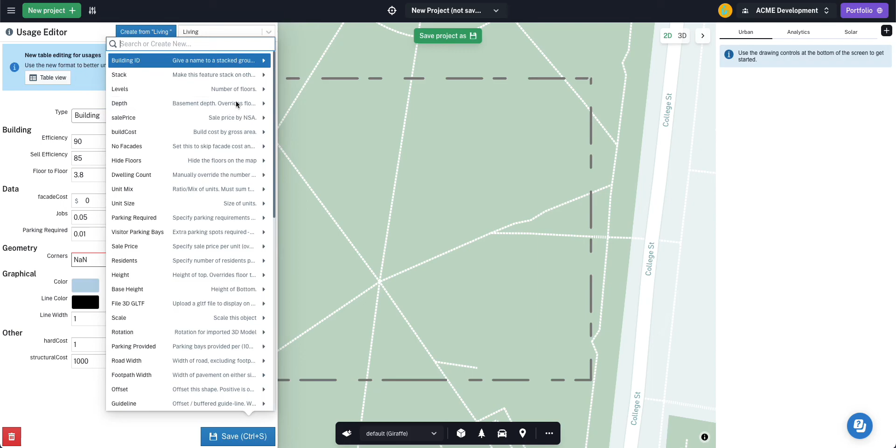Then I'm going to say the fit out cost. I'm going to say $1,000 for the living. Then I'm adding another property called the services cost, and that's going to allow for things like the electrician and all that sort of stuff.

And I'm imagining these as a per meter cost, so $1,000 per meter. I could think about this: how many joists do I need? What are their centers? What's the linear meter cost? Okay, good. Boom, boom, boom. It's $1,000. Multiply it out.

Save that. So these elemental costs can have sub elements, but for this approach I'm not going to do that. Now I'm just rolling them up to the right granularity.

So the structural cost for the bathroom is going to be the same. The fit out's going to be double, and the services is going to be much more. And the color's got to be slightly different.

Save, and then from bathroom I'm going to create kitchen and make that kitchen a warm, homely yellow. Oop, it's gone brown. Maybe that's about the same, maybe slightly lower. I'll just put some different numbers so we're looking at something different. The services cost is 900.

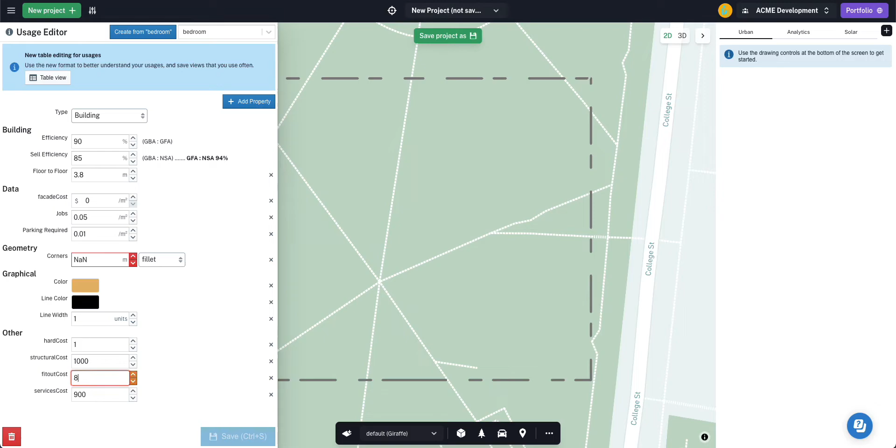Then the final thing I'm going to build is bedroom, the 4 main room types in a house, and that'll come down to 800 and 240. Save changes. Okay, and with that we can design the house.

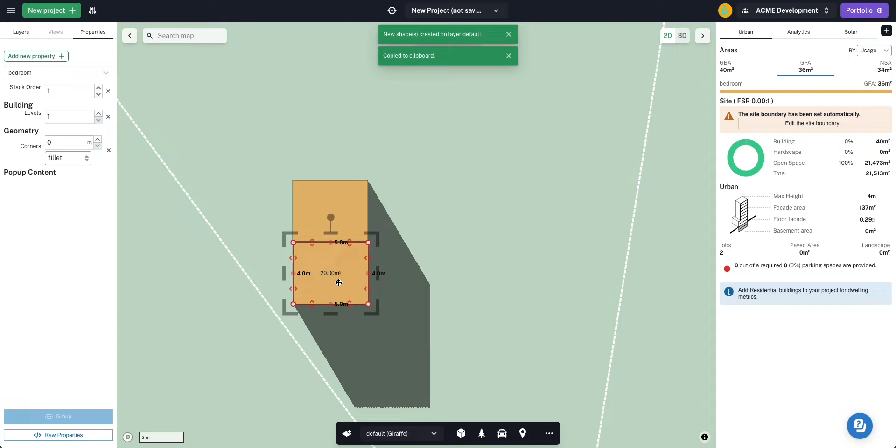So the bedrooms are going to be 4 by 5 meters, nice big bedrooms, and I'm just going to make them one level. There we go. Okay, there's my bedroom wing.

Now I'm going to create a bathroom, and I'm going to make one like that, just like a little ensuite for this bedroom. Then I'm going to create another one like this behind it for everybody.

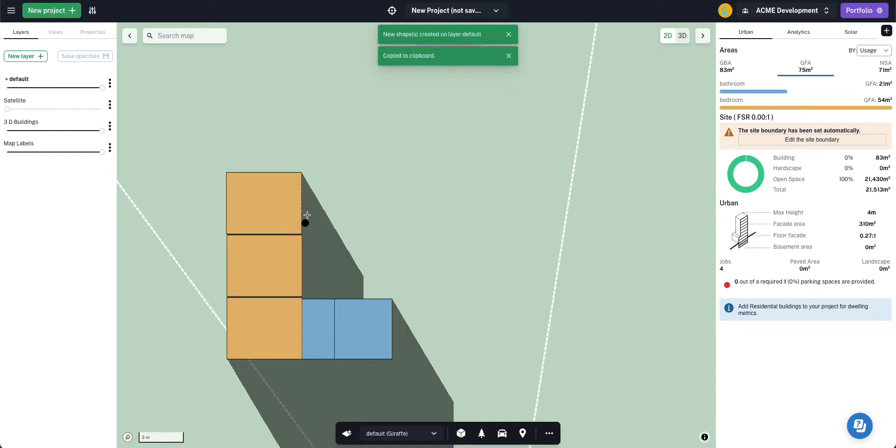I'll put one more bedroom over here. This is a big old house. Then I'm going to copy paste and put a kitchen like this. Then I'm going to copy paste and put my living.

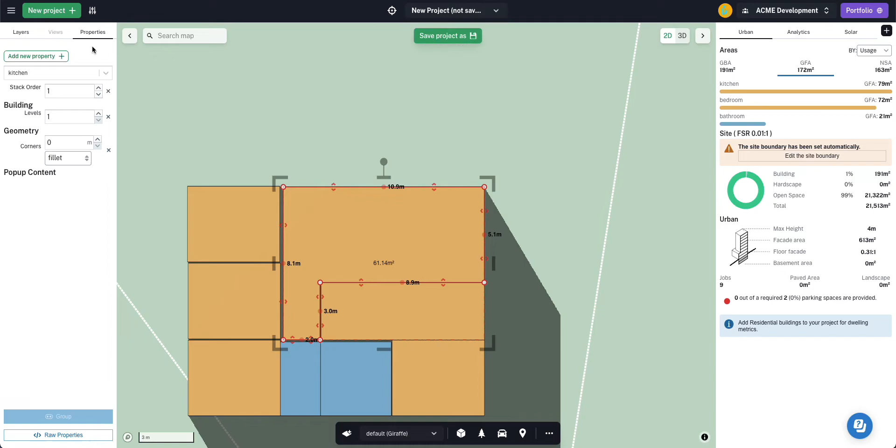Now you can see I've made, and I'll just use the living for circulation. I've made a mistake in that I haven't changed the color for bedrooms. Let's just change bedroom to something else. Save. Okay, and for some reason, oh yeah, I haven't set this to living yet.

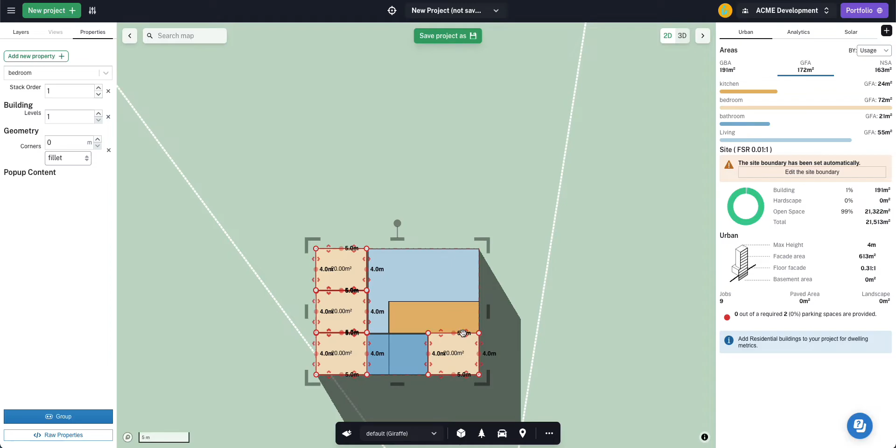Okay, so we have living in blue, 55 square meters, kitchen 24, and then we have all these bedrooms. This is a mega bedroom house. Maybe I'll make these a little smaller. All right, and I've got these 2 bathrooms.

So you can see I've got these zones, and I'm going to use these now to drive the cost plan. I'm not going to build an entire cost plan, I'm going to build 3 sections that show you the principles.

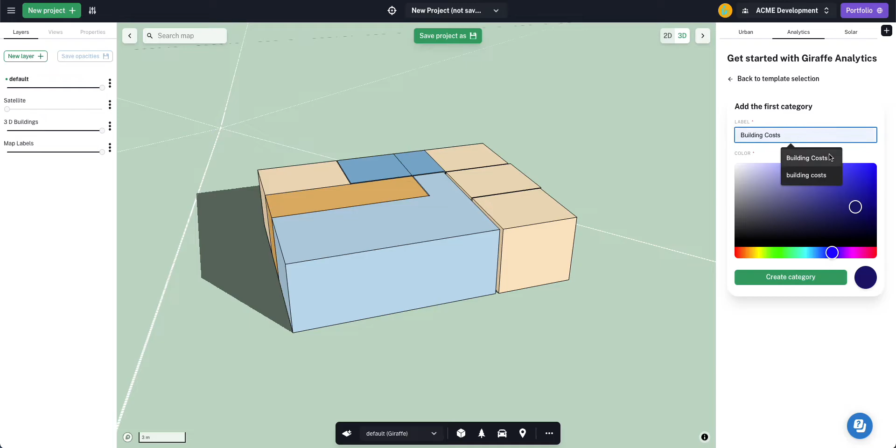So starting with a blank slate, I'm going to call these the building costs - these are the direct building costs. And I'm going to add a measure. Now in Giraffe, every measure needs a name. I'm going to do the structure costs in dollars.

And the way costs work in Giraffe is you have a formula, which can have like A divided by B, A star B, A slash B. The A and the B are these components, and these components refer to the model which we've just created. The properties of that model can be things like area, so gross area in square meters, or they can be things like structure cost.

So gross area is computed by Giraffe when you draw a line, and structure cost we apply directly to each of our usages. And we're going to go A times B - gross area times the cost per square meter. The quantity is 26 meters for our kitchen, 26.86, and the rate is $1,000.

And I'm actually going to turn that on for us, if I can. Giraffe's guessing that the quantity is 27 and the rate is... and Giraffe's right in this instance. And I am now going to save that change.

And we'll see there, we've got the structure cost. And if I extend our house out, that structure cost goes up, and if I shrink our house back down, that cost goes down. And that's the basic building block of a Giraffe cost plan.

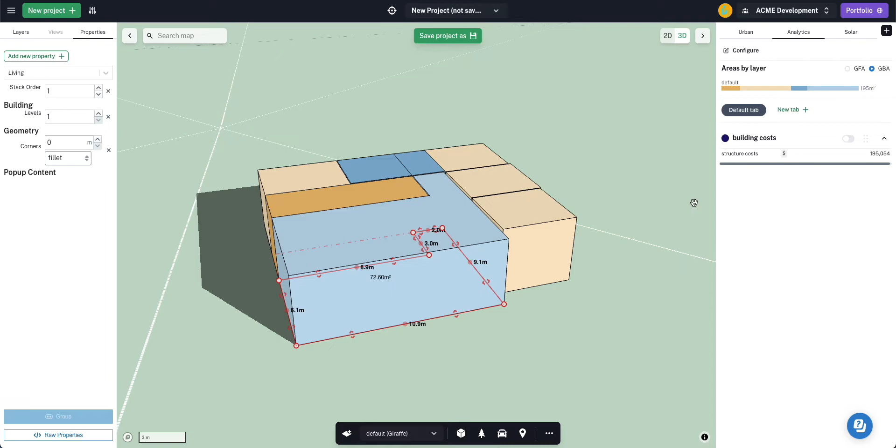But let's do a bit more. So we'll duplicate it and we'll call this services cost. And instead of the structure property, we're going to look for the services property and we're just going to hit save. And the numbers are different, which is good. And we're going to duplicate that and we're going to do fit out costs. And instead of services or structure, we're going to just pull out fit out, and then we're going to save.

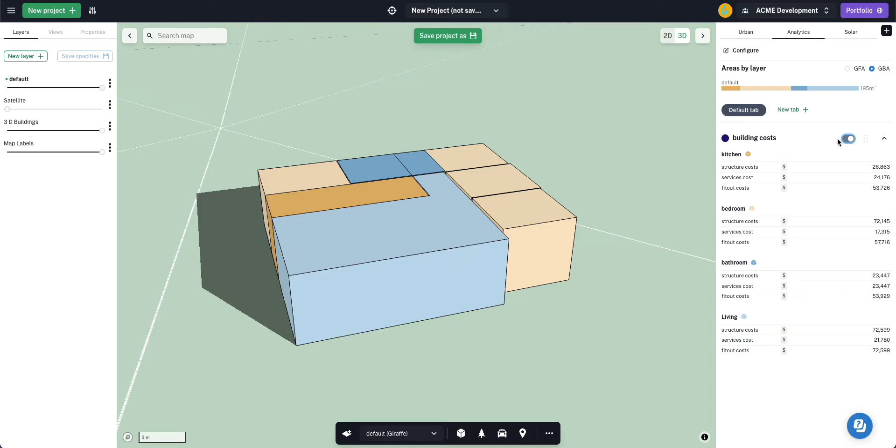All right, so we've got these 3 lines. Each of them depends on the different usages. And I can demonstrate that by clicking this toggle, which breaks down these equations, structure cost, but instead of being every single element in the whole model, and you can click through them like this if you just click on the number, it breaks it down per usage.

So you can see the kitchen, there's only 1 kitchen, there it is, and it costs that amount. Or you can see the bathroom, there's actually 2 bathrooms. So I can toggle through the 2 bathrooms. One's 8.49 and one's 15 meters. And it just shows the different, for bedroom, the structure cost is 1,000, sorry, the services cost is 240, but for bathroom, the services cost is 1,000.

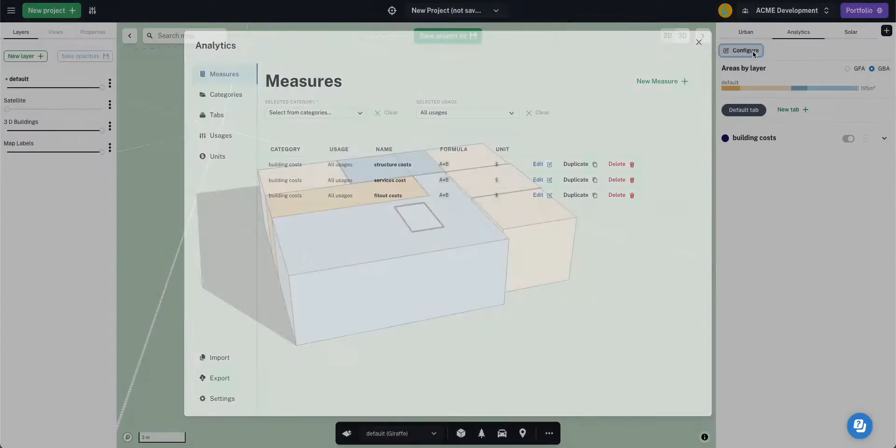All right, so let's collapse that. And now let's create a new category. So I come to the analytics configuration menu, I've got a new category, and I'm going to call this category fees and taxes. Create it. And I'm going to go and create some measures for that. That measure is going to be design fees in dollars. And I'm just going to get the subtotal. I'm going to go currency and building costs, $519,000. I'm going to go A times 0.05, so 5%, save changes.

Now we're going to create a new category, and this category is going to be called contingency. It's going to be 10% of both the building costs and the currency, the fees and taxes. You add both of those things together and then you multiply them by 10%. So our contingency becomes $51,000.

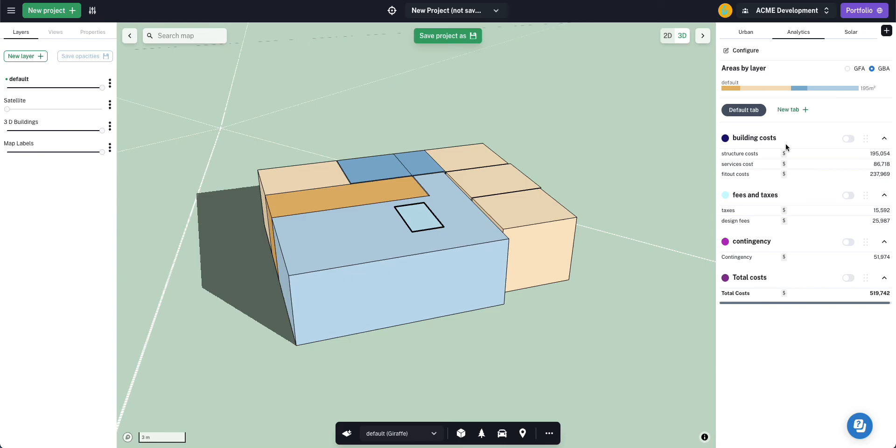All right. So now I've got my structure costs, total structure costs, my taxes, my design fees, my contingency, and my total costs. And this is a fantastic cost plan. And when I break it down per usage, if I decide to export this thing, you can see that because I've defined a quantity and a rate, what Giraffe is able to do is go to the kitchen and go my structure costs based on a rate of $1,000 on 27 meters. Roughly, it's actually 26.8. We're rounding the quantity over there.

And so you're getting everything that you need in terms of these costs, which is really, really awesome. So you can export that into Excel and have a cost plan. And that is how you build a very quick cost plan in Giraffe.